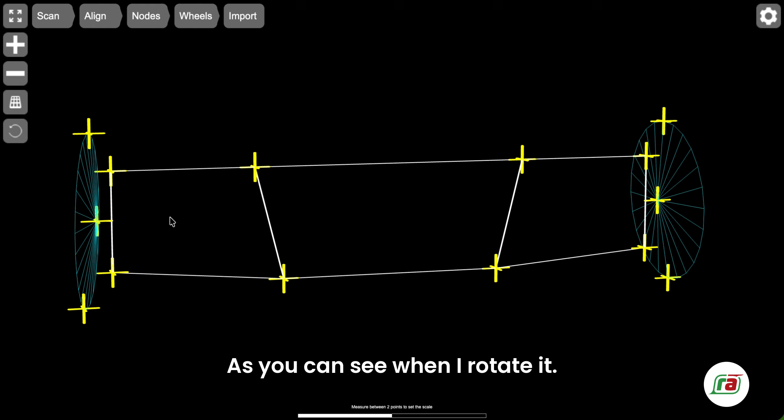Welcome to the new image import feature for the Scanned Model Importer. Let's begin by opening the calculator. First thing you'll notice is the wireframe looks a bit different. We've got a better visualization for the wheel center and the hub as well, as you can see when I rotate it. They look more connected than they did previously.

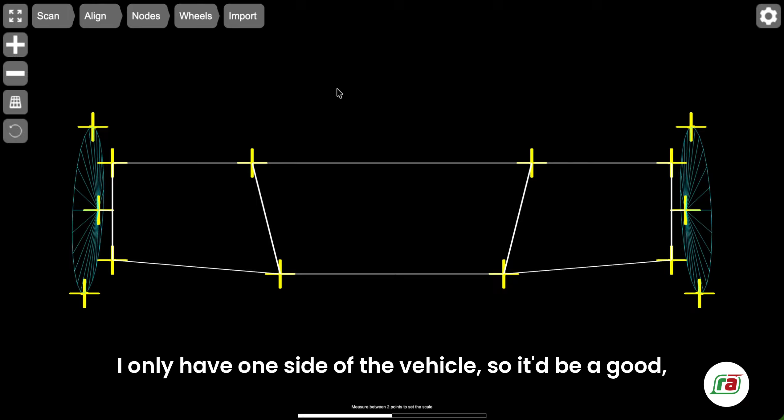I have a Lotus 33 image that I'm going to import. I only have one side of the vehicle, so it'd be a good example for the mirror function. Scan, upload, and I'm going to drag the file across. It's got it, let's upload it.

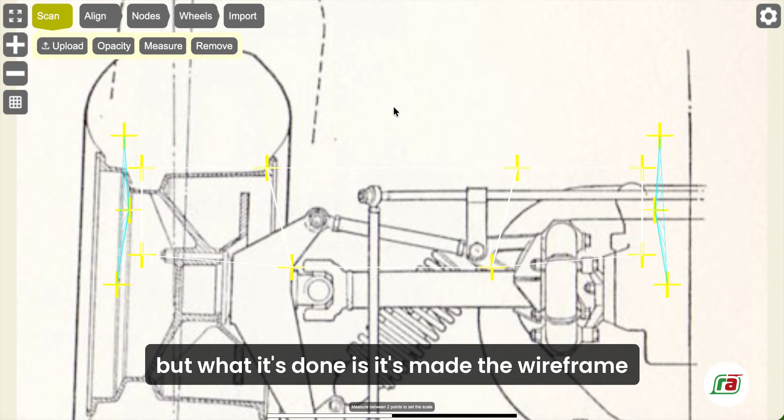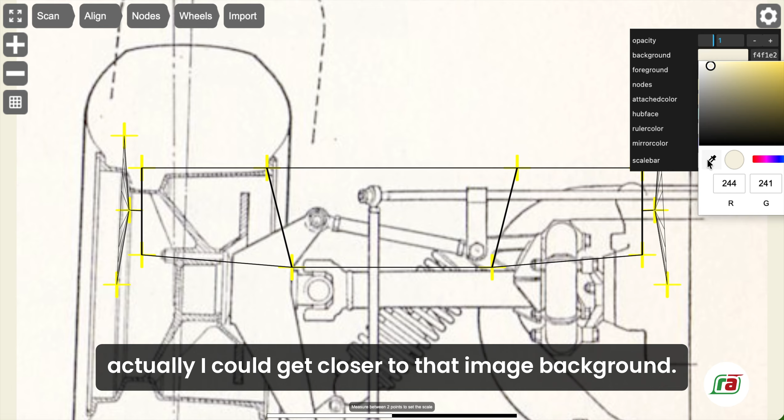Right, the background colour has changed to match the image background, but what it's done is it's made the wireframe a little bit difficult to see, but that's not a problem because we can change the colour of the wireframe by going to the setup icon here, and we want to change the foreground colour to black. That's good. Background we're happy with. Although I think actually I could get closer to that image background. Great.

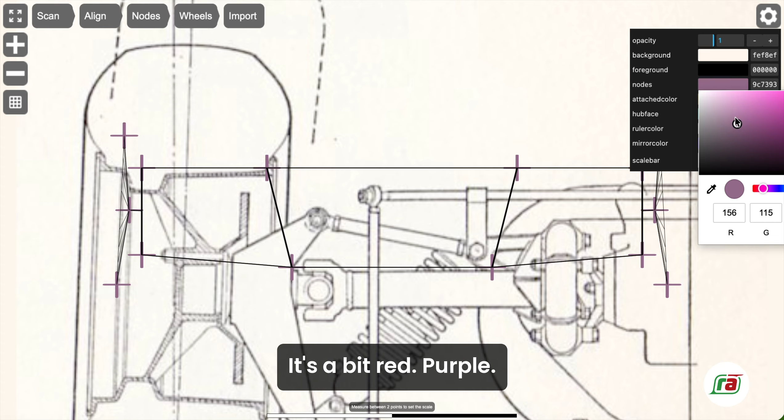The nodes, they're the crosshairs representing the ball joints or spherical bearings, are yellow. Let's make those a different colour, shall we? Let's make them red, purple, check that out. Right, and the hub, which is the cone there. Let's change that to a different colour. Maybe we'll change that to green or something, a dark green. Brilliant, so you can see everything a bit better now.

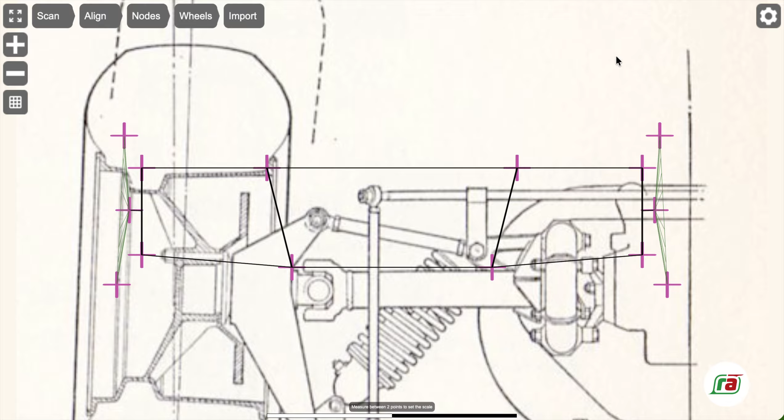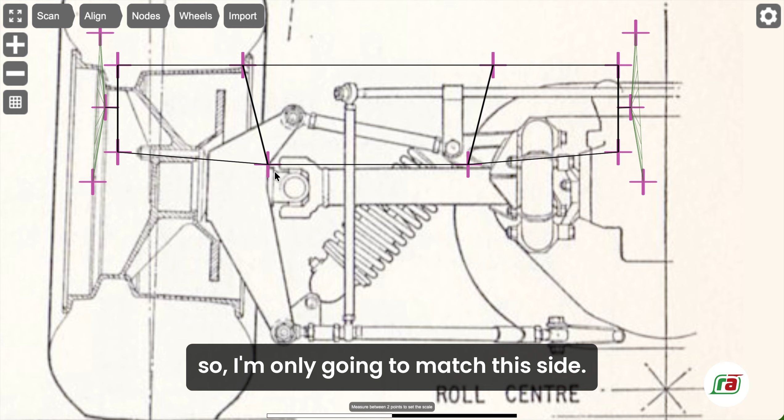Right, let's start then by just matching these nodes to the points on the image. Bearing in mind I've only got half a model here, so I'm only going to match this side. I'm not even going to bother moving the other side. I'm going to use the mirror to do that entirely. So drag down here. Oops, that got in my way. Centre of that spherical bearing. Centre of that one there.

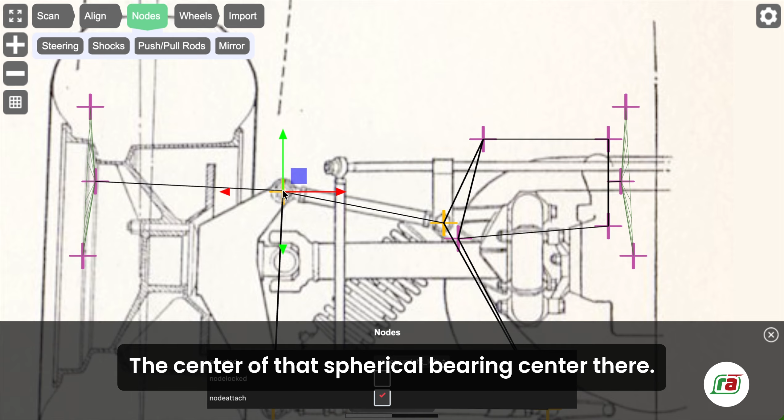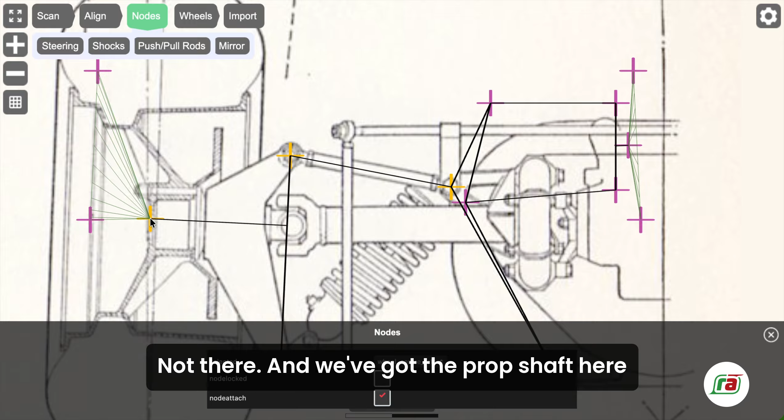This one here. Centre of that spherical bearing, centre there, and then, right, so now we've got the wheel centre, which you can spot because the cone visualization changes when you move it. That wants to be the very centre of that wheel nut there, and we've got the prop shaft here, so we can use that as a guide. Let's put it there.

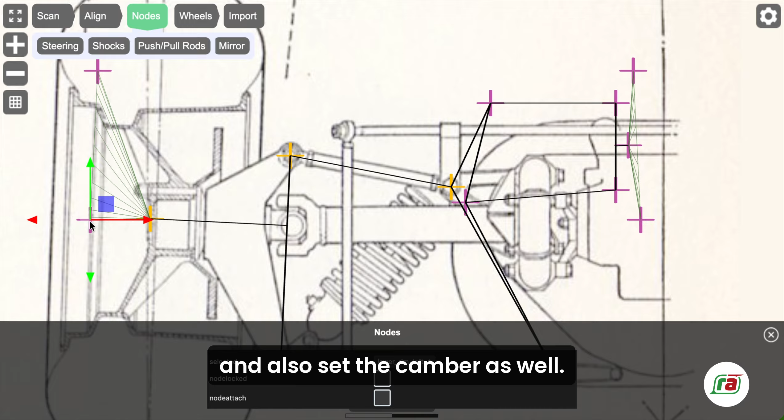These other two here, they map to the face of the hub. They allow you to set the offset on the rim and also set the camber as well. So let's go and map that here. As we change that, you can see all sorts of strange things happen to the stub axle, but it's fine. We'll correct that in a sec. And top one as well. That's going to mate up with the front of the disc. Lovely.

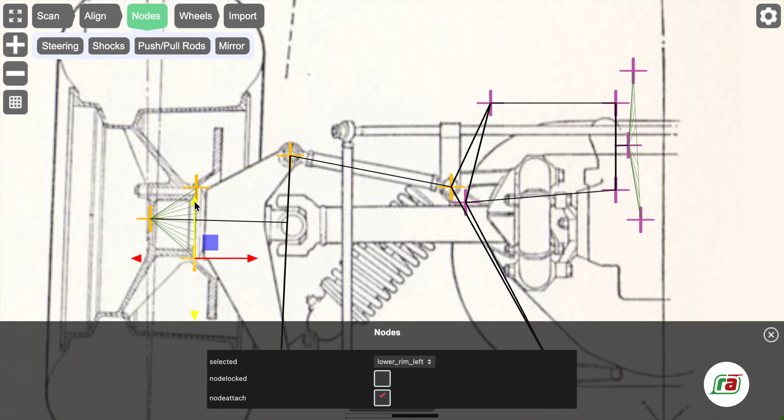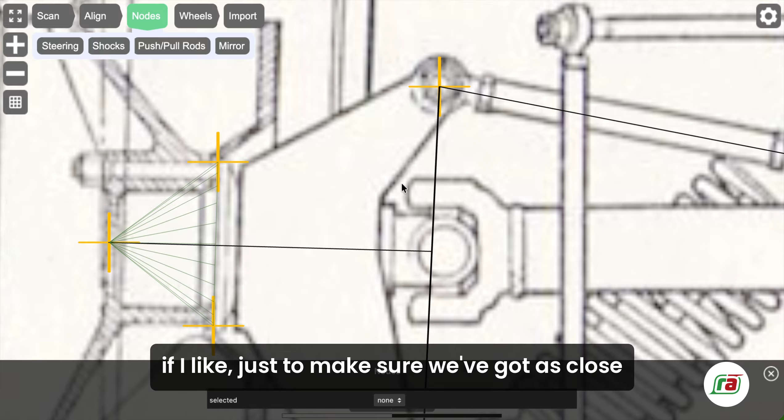You can see now that the wheel centre has changed a bit because the angle of the hub face has changed. So I can drag that down a bit. Definitely centre there. Zoom in if I like, just to make sure we've got as close as possible to the drawing as we can. Very nice. Wheel centre there. Centre of that spherical bearing. Centre of that one. Centre of that one, centre of that one.

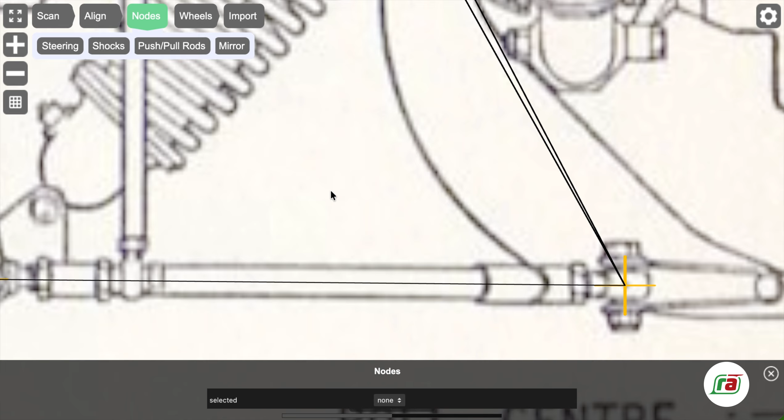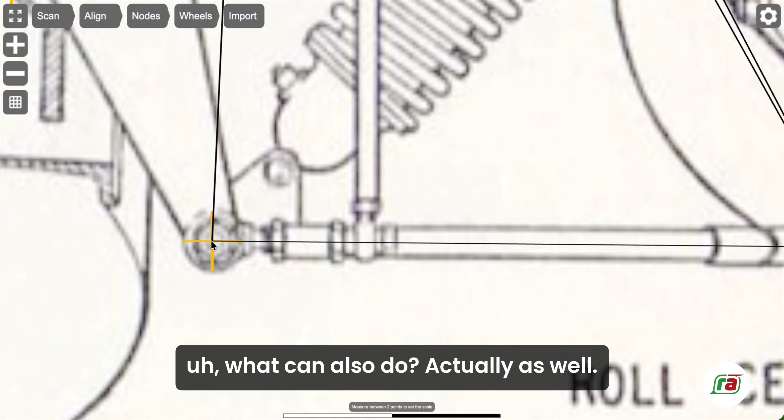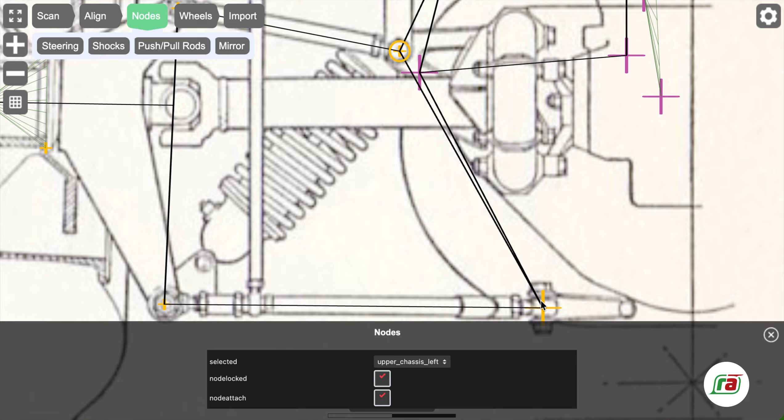You can see the nodes change colour as I move them. That's because they've moved to this node attached state. So if you do rotate the drawing or anything like that, the nodes will rotate with it. Whereas if that was unchecked, they wouldn't. What we can also do, before closing that, is tick the node locked option. This stops you from accidentally moving the position of those. And it makes the crosshairs a little smaller. Great. That's all of those done. That's one side mapped. Excellent.

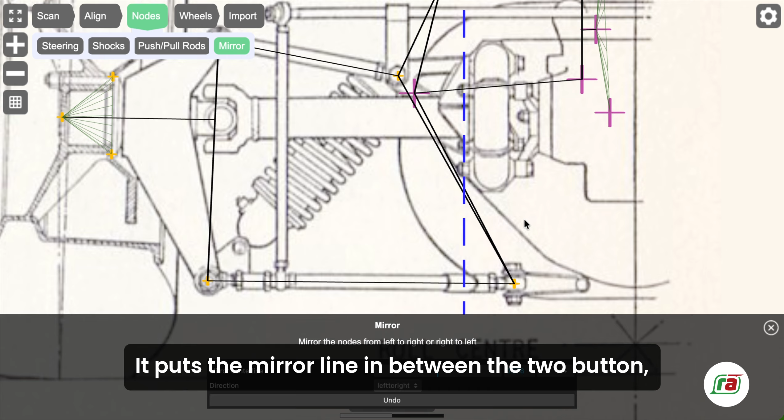Let us go and mirror the other side. We've got this handy little vertical line on the drawing. Let's use that. And go to nodes, mirror. It puts the mirror line in between the two bottom chassis points, which is completely wrong at the moment. But what we can do is, using this bar on the bottom, we can drag it along. Get it to match up with that line.

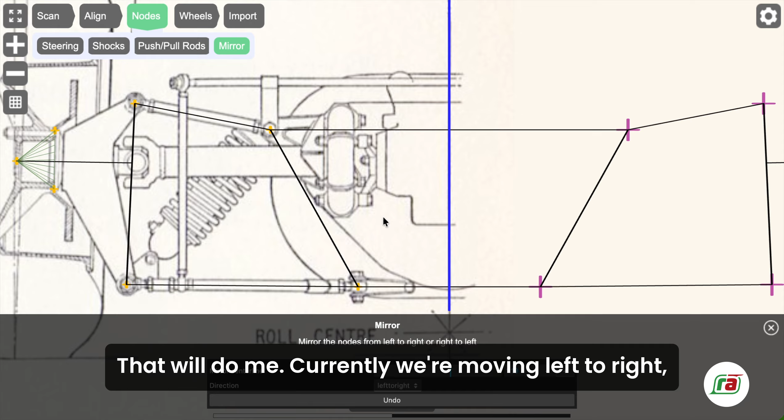That'll do me. And currently we're mirroring left to right, but we could reverse it and mirror right to left. You can undo this as well and close this if you're not happy with what happened, if you think it was too much. But I'm happy with this, so let's just close it. Brilliant.

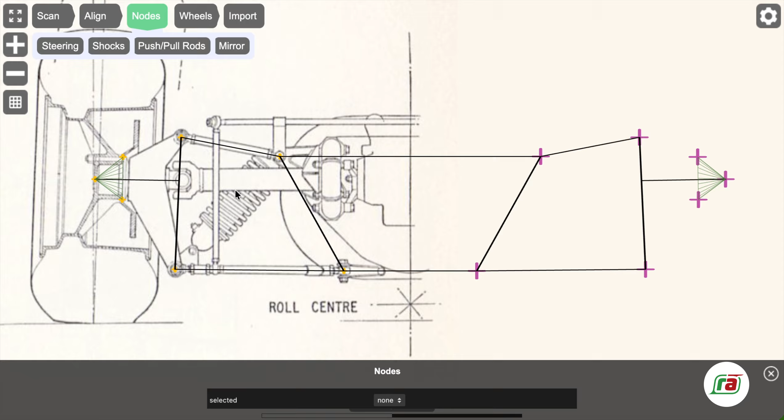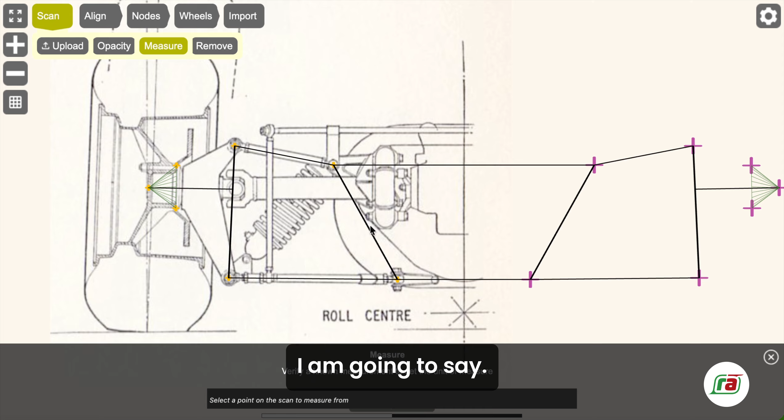Next up, wheels. Let's add some wheels. Before I can add wheels, I have to give this a scale. So currently all the measurements are arbitrary, but what we want to do is measure some points so we can give it an actual scale. I reckon the legs of this upper wishbone are, let's say, 300. Right, and using that one measurement, we've got dimensions throughout the drawing.

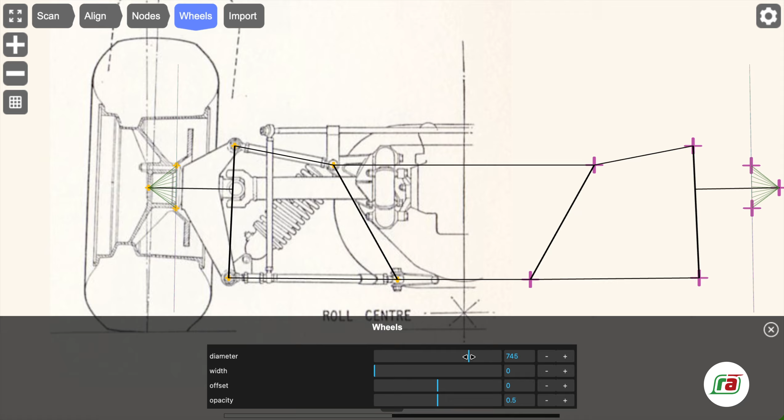Now if I go and add some wheels, first thing to do, add the wheel diameter, which is in millimeters. You can see a faint wheel outline starting to appear here, emanating from the hub face, centered on the wheel center here. It's a bit skinny, those wheels being 1 pixel wide. Let's make them a bit wider. Starting to appear now, that wheel. That's good. I reckon we need to change the offset though to move this wheel into the right position. Get in there. Just go a bit wider. Change that offset a bit more.

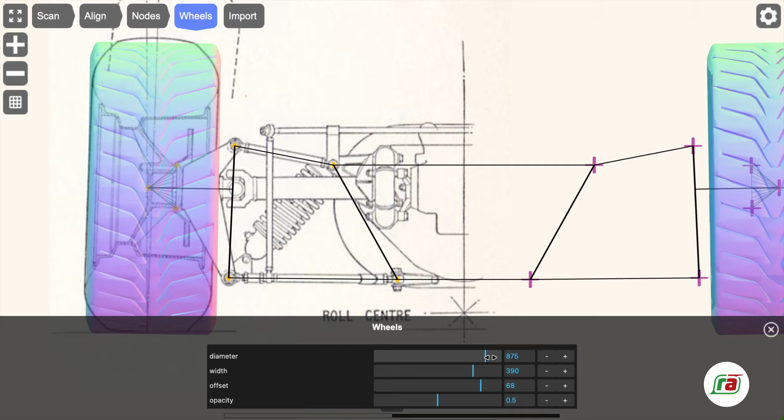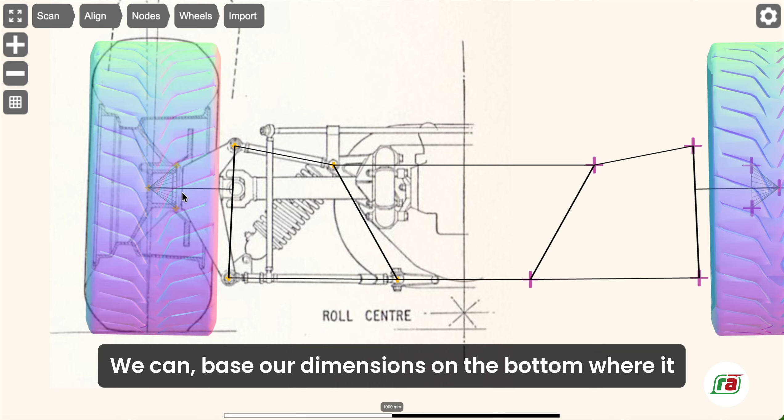Our camber looks a bit off, so I might have to look at the position of the hub face, and then we can see there's a bit of an imperfection between the wheel top and the wheel bottom. Maybe that's got a bit of squish on the wheel bottom. We can base our dimensions on the bottom where it reaches the ground, which is the important bit. Let's do that. Let's pull that back so they all meet.

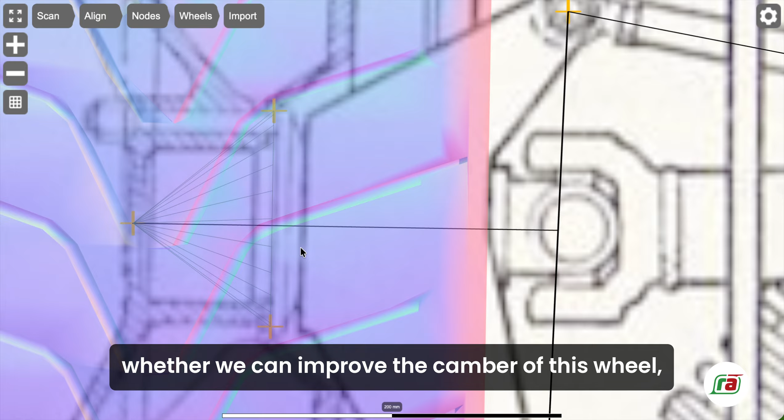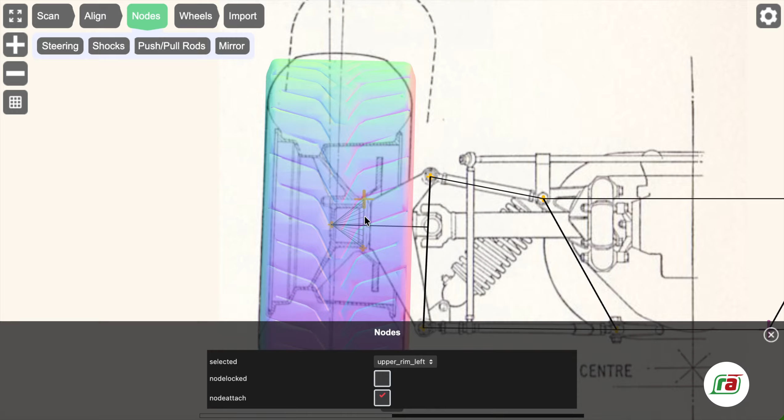And then let's have a good old zoom in to see if we can improve the camber of this wheel, which just looks a little bit off. Select it, it's currently locked, so we can't move it, so let's unlock it. And just drag that over a touch. Okay, and then let's change the wheel center, because I reckon that's moved a touch now. Looks better.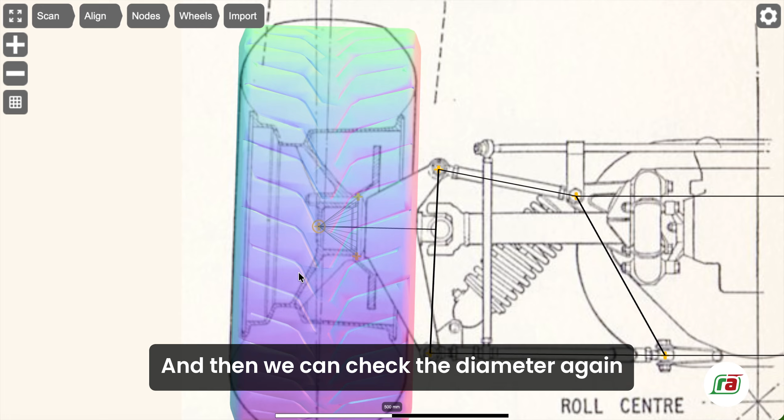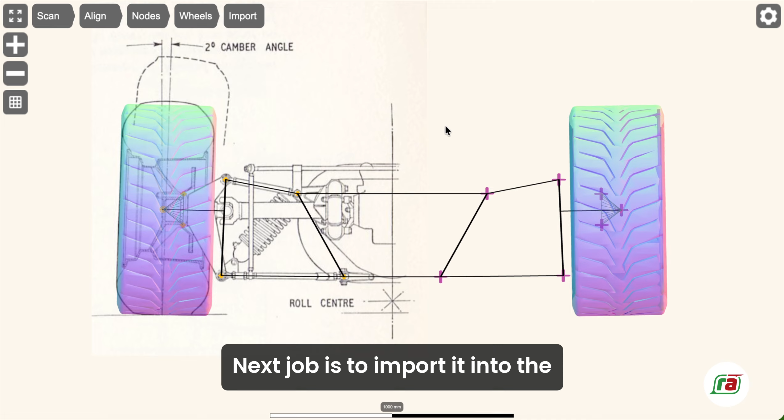And then we can check the diameter again based on the ground point. Looks very good indeed. Just going to zoom to the extents. Really nice. Next job is to import it into the suspension geometry calculator, and then analyze the roll center.